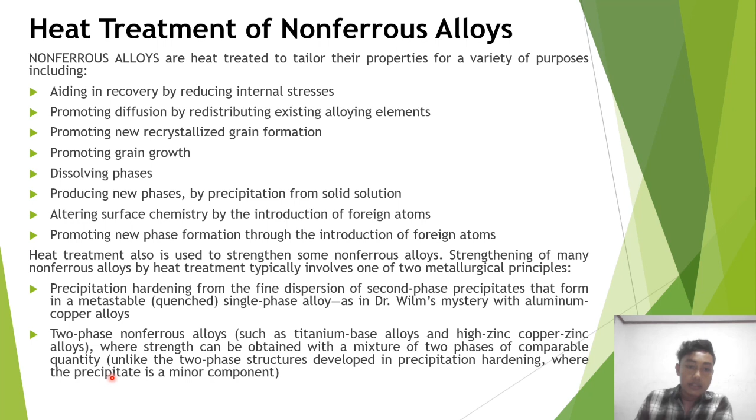Strength can be obtained with a mixture of two-phase comparable quantity, unlike the two-phase structure developed in precipitation hardening, where the precipitate is a minor component.

Some common non-ferrous alloys that can be hardened through heat treatment include solution-treated and aged aluminum alloys, such as aluminum copper alloys.

Solution treatment and aged cobalt alloys. Solution treatment of copper alloys such as beryllium bronze, spinodal hardening alloys, and order hardening alloys.

Quench hardened metastable copper alloys such as aluminum bronze, nickel aluminum bronze, and some copper zinc alloys.

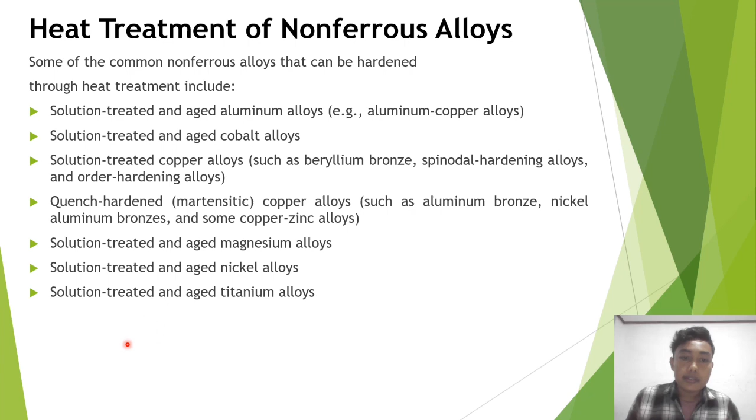Solution treated and aged magnesium alloys. Solution treated and aged nickel alloys. Solution treated and aged titanium alloys.

Next, the first material topic is recovery and recrystallization annealing. Annealing is a generic term used to denote a thermal treatment process involving heating a material to an aim temperature and holding or soaking it for a sufficient length of time at that temperature, followed by cooling at a suitable rate.

When annealing is performed for short periods of time at a low temperature, the hardness of a cold-worked alloy remains relatively constant. This initial stage is referred to as recovery annealing, as shown in picture 14.1.

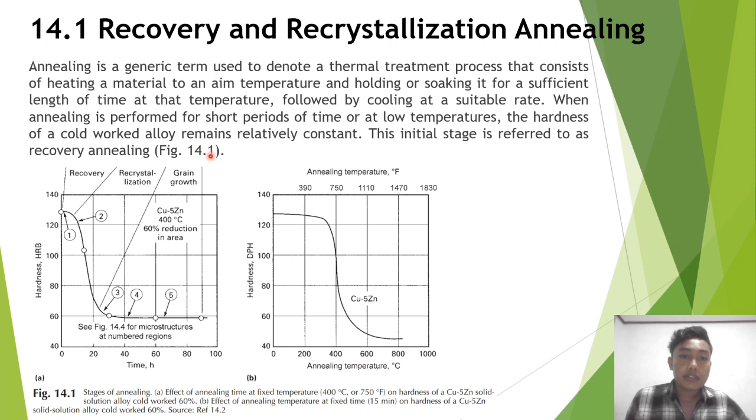Some properties do change during recovery annealing. For example, the electrical resistivity of an alloy, typically increased by cold working, can be recovered before annealing has a significant effect on hardness, as shown in figure 14.2.

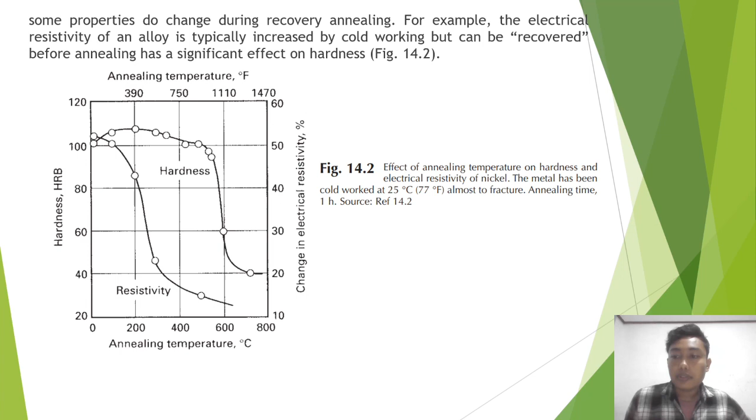Next, considering the extent of cold work: for example, an increased amount of cold work prior to annealing lowers the recrystallization temperature, as shown in figure 14.3a. There is also an approximate relationship between melting temperature and recrystallization temperature, shown in figure 14.3b.

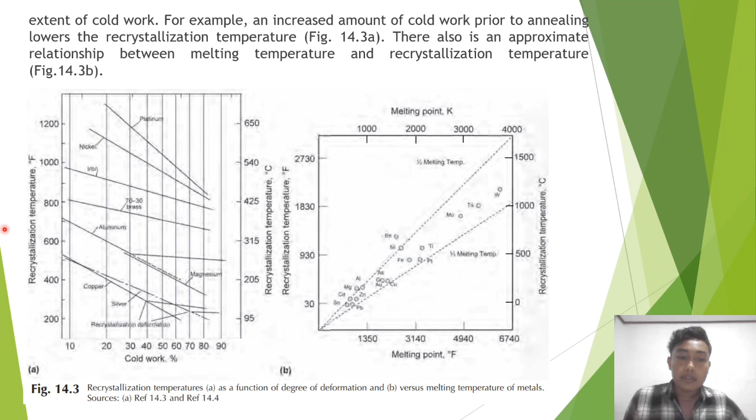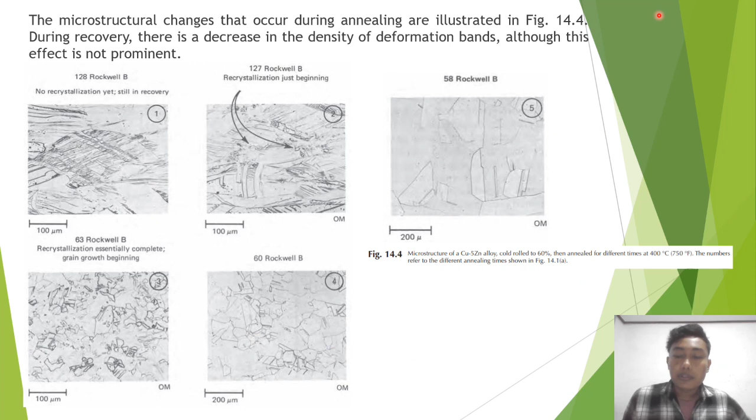The second material topic is heat treatable aluminum alloys. Wrought and cast aluminum alloys are commonly designated by a series originally developed by Alcoa. The series classifies aluminum alloys by principal alloying elements, as shown in table 14.4.

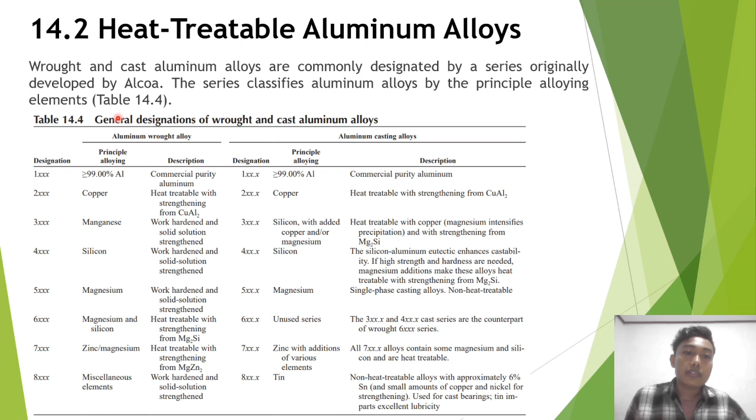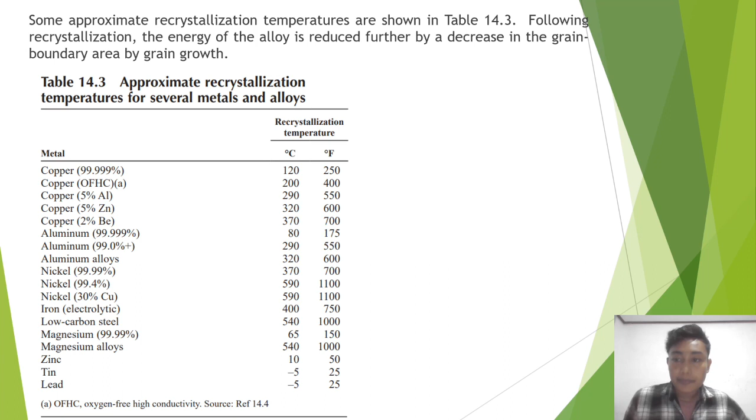Next, wrought heat-treatable aluminum alloys include aluminum copper alloys, like the 2XXX series. The aluminum magnesium silicon series is the 6XXX series, and the aluminum zinc series is the 7XXX series.

And the aluminum lithium alloys are the 8XXX series. These alloys achieve a higher level of static tensile strength, but with less improvement in fatigue endurance, as shown in figure 14.5.

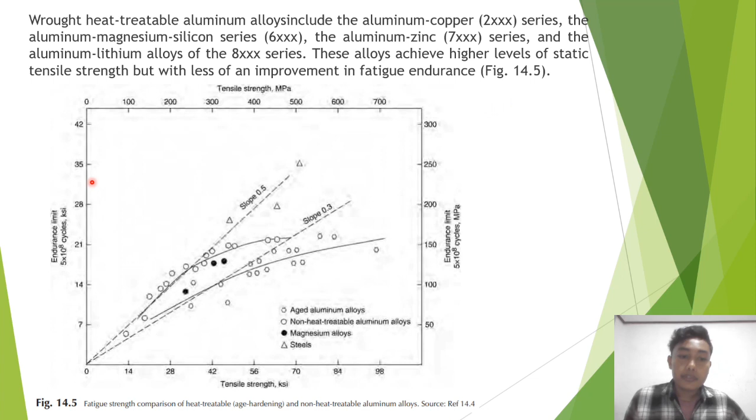Next, 14.3 cobalt alloys. Cobalt is useful in applications that make use of its magnetic properties, corrosion resistance, wear resistance, and strength at elevated temperatures. Biomedical application is another important use.

The initial biomedical applications of cobalt-based alloys are in the dental field, and early on, the alloys showed excellent wear resistance, corrosion resistance, biocompatibility, and mechanical properties.

Alloys for high temperature strength include a number of cobalt alloys.

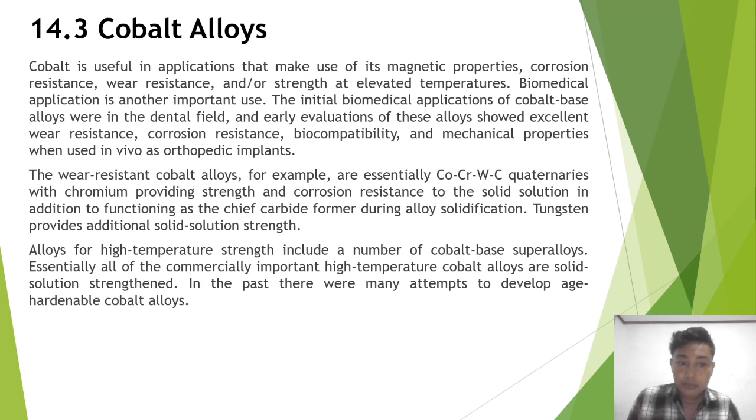Essentially, all commercially important high-temperature cobalt alloys are solid solution strengthened. Yet in the past, there were many attempts to develop age-hardened cobalt alloys, including those with cobalt, nickel, chromium, and molybdenum.

For corrosion resistant applications, there is the alloy MP35N, or UNS R30035, which is a cobalt-based composition of 35% nickel, 20% chromium, and 9.75% molybdenum, with the balance cobalt.

Following this, the presence of Co3Mo forms at platelet boundaries in the MP35N alloy during age hardening.

There is another age hardening alloy, a nickel-rich alloy, which is a combination of 36% cobalt, 19% chromium, 7% molybdenum, and balance nickel.

The difference is in their maximum operating temperature. The MP35N alloy is useful up to 400 degrees Celsius, or 750 degrees Fahrenheit, while the MP159 alloy maintains its hardness up to approximately 600 degrees Celsius, or 1110 degrees Fahrenheit.

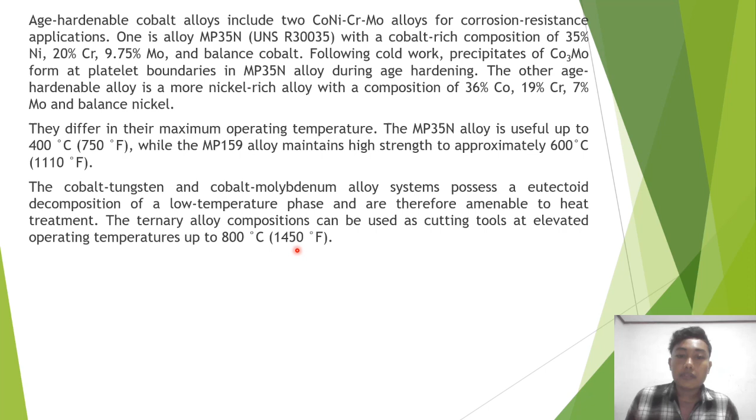Next, the next chapter is on copper alloys.

Copper can be hardened by solid solution alloying and by work hardening. The commonly used solid solution alloying elements, in order of their effectiveness, are zinc, nickel, manganese, aluminum, tin, and silicon.

A list of selected copper alloy compositions and their properties is given in Table 14.5. In this table, the alloys are arranged by common alloy group.

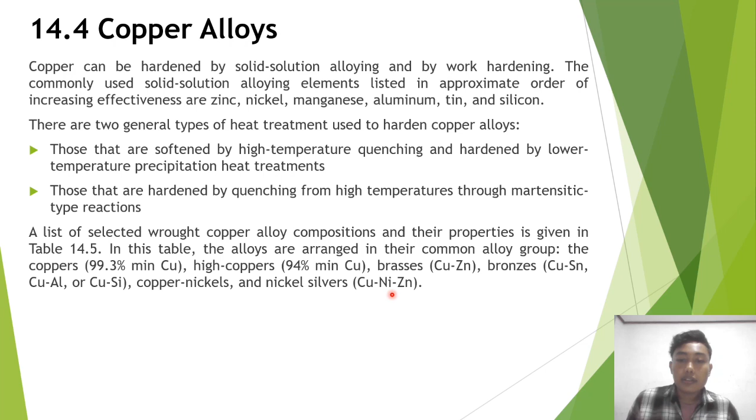Copper is 99.3% minimum copper. High copper is 94% minimum copper. Brass is copper-zinc. Bronze is copper-tin, copper-aluminum, copper-silicon. Copper-nickel and nickel-silver are copper-nickel-zinc alloys. This table is shown next.

Next, precipitation hardening copper alloys.

Precipitation hardening mechanisms are used in a few but important copper systems, including precipitation hardening beryllium copper alloy, also sometimes referred to as beryllium bronze.

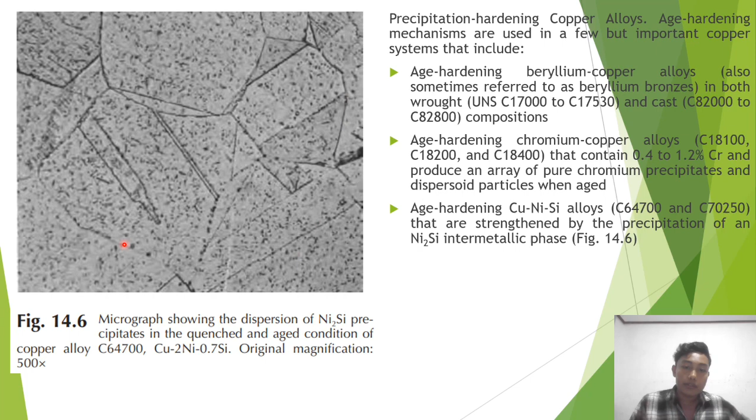Table 14.6 summarizes typical heat treatments for some hardenable copper-based alloys. Copper alloys are hardened by elevated temperature treatment rather than aging at room temperature.

Again, as in the case of aluminum alloys, the supersaturated solid solution proceeds through the precipitation cycle. Hardness increases to a peak, followed by a reduction in hardness with time. This is table 14.6.

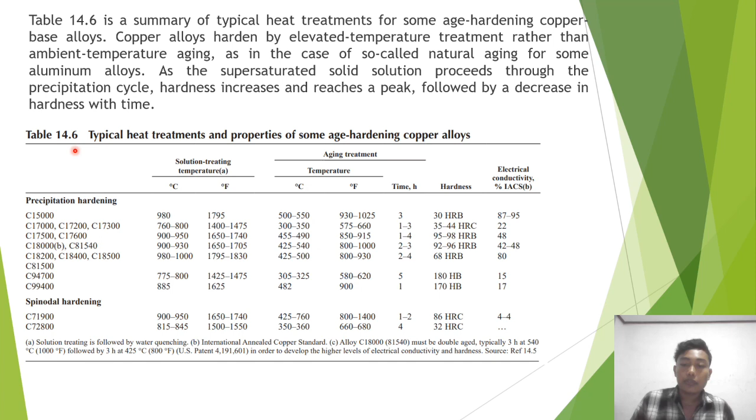Precipitation hardening copper alloys can be thermomechanically processed to provide a unique combination of formability, electrical conductivity, softening resistance, and stress relaxation resistance. As an example, the solution treatment of beryllium copper alloy is performed by heating the alloy up to a temperature slightly

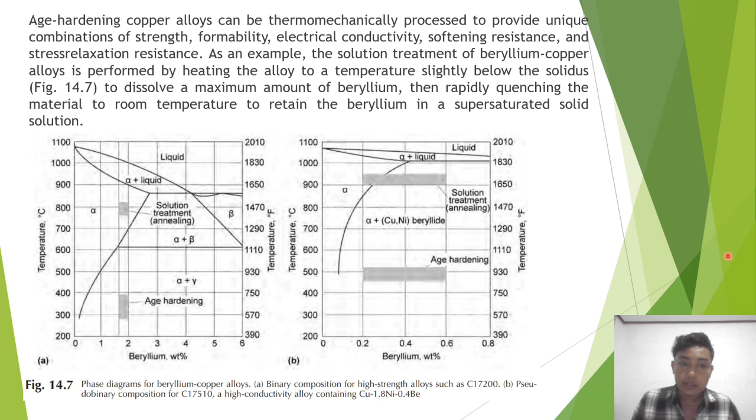below the solidus, as you can see in picture 14.7, to achieve the maximum amount of beryllium in solution. Rapidly quenching the material to room temperature traps the beryllium in supersaturated solid solution. This is the picture, as you can see.

In contrast, spinodal reaction involves continuous or homogeneous clustering or unmixing of atoms into a two-phase structure by spontaneous growth for small composition fluctuations, as shown in picture 14.8B. This is 14.8A and 14.8B.

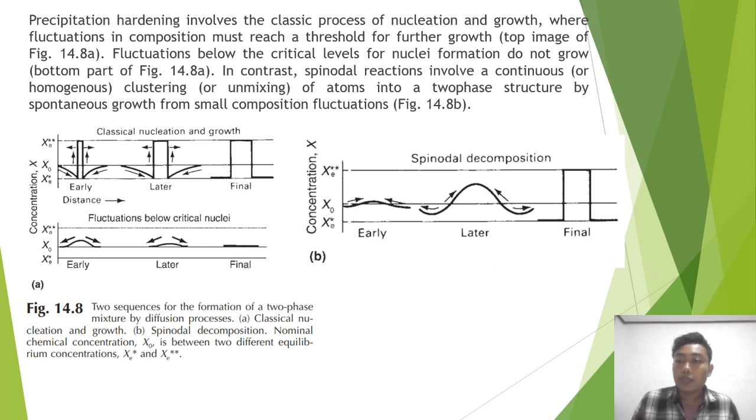The chemical segregation occurs at a very fine scale and requires the use of electron microscopy to be discriminated, as in picture 14.9. The microstructure developed during spinodal decomposition has a characteristic period, typically 2.5 to 10 nanometers, or 25 to 100 angstroms, in magnitude.

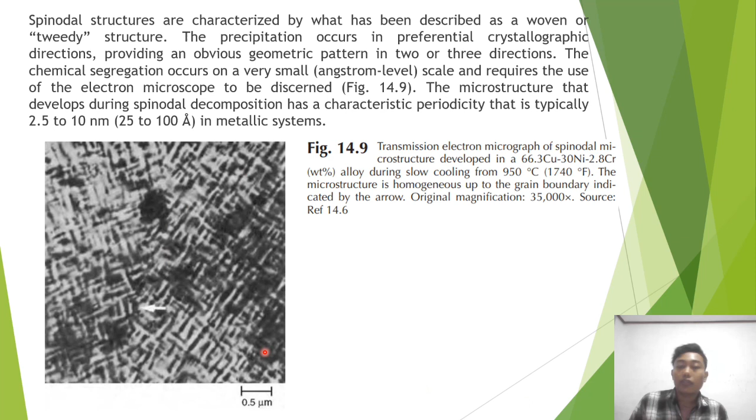These are the pictures. Heat treatment of aluminum bronze. Aluminum bronze includes 2 types.

The first is single phase aluminum bronze alloy with an FCC alpha phase crystal structure. The second is two-phase aluminum bronze, which contains the FCC alpha phase along with either a body-centered cubic beta phase, or B, solid solution phase at high temperature, or

gamma-2 intermetallic phase at lower temperature, as shown in picture 14.10. And then next,

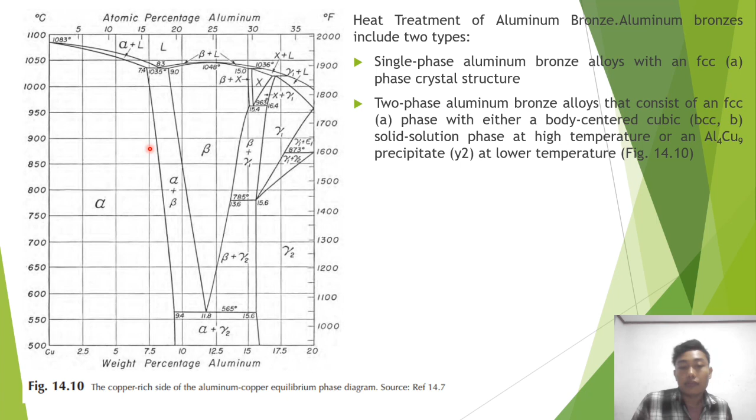like eutectoid steel with Fe-0.77%C eutectoid composition, if you have an alloy combination of Cu-11.8%Al, slow cooling from the beta phase produces a microstructure of alternating lamellar structure, like in picture 14.11, much like pearlite in steel.

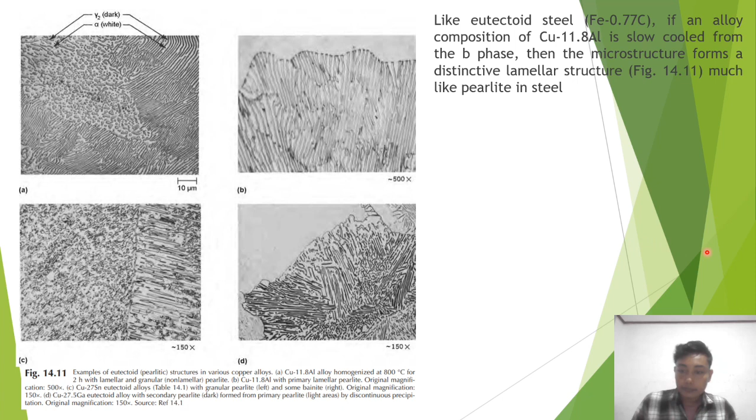This is a picture, as you can see. And next, the microstructure of beta prime has a different structure, like a plate-like morphology, as shown in picture 14.12.

Quench hardening is done with two-phase aluminum bronze containing 9 to 11.5% aluminum, as well as nickel-aluminum bronze with 8.5 to 11.5% aluminum. This is the picture.

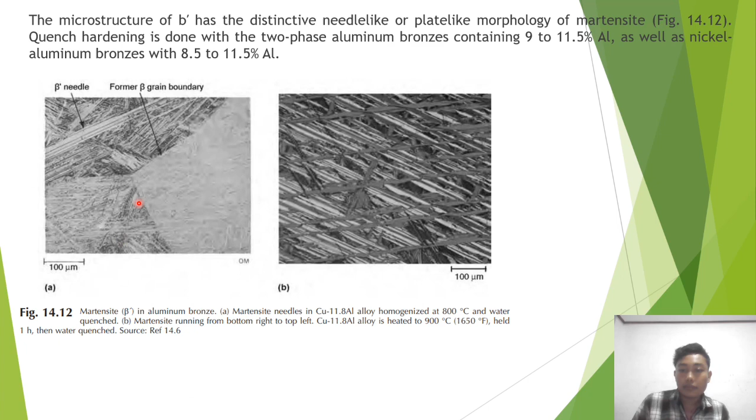Next, about table 14.7, which gives typical tensile properties and hardness of 2-phase aluminum bronze after various heat treatments. You can see this in the table.

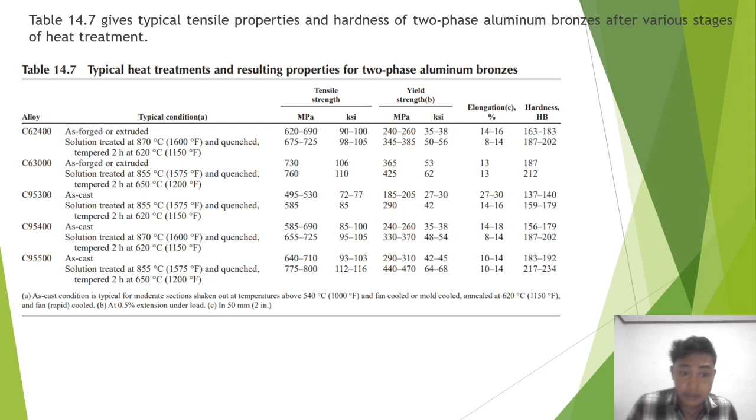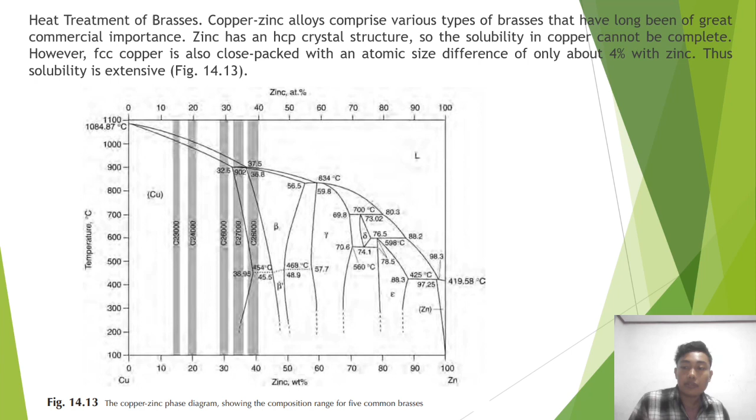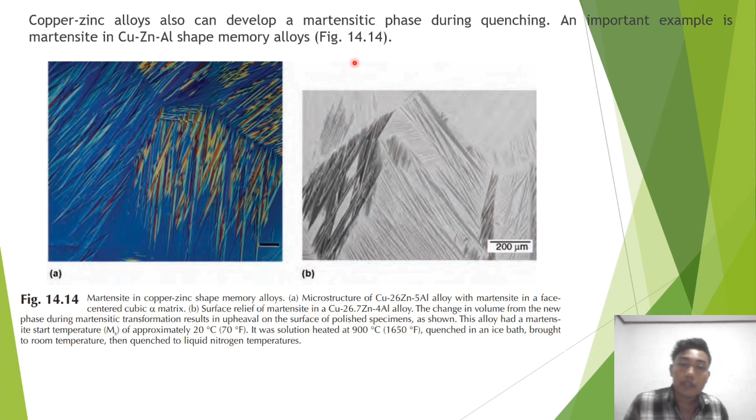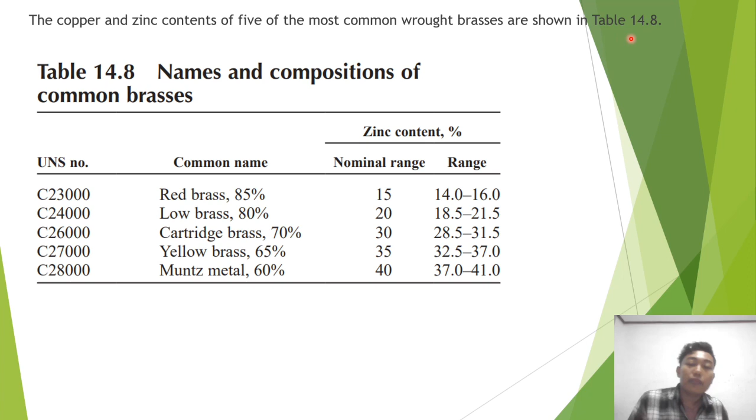This is picture 14.13. Next, copper-zinc alloy can also develop a martensitic phase during quenching, an important example is martensite in Cu-Zn-Al, as shown in picture 14.14. Copper-zinc content found most commonly worldwide is shown in table 14.8.

Next chapter is magnesium alloys. The precipitation occurring in many magnesium alloys does not always result in hardening. In many magnesium alloys, lattice straining is lost early in the formation of precipitates.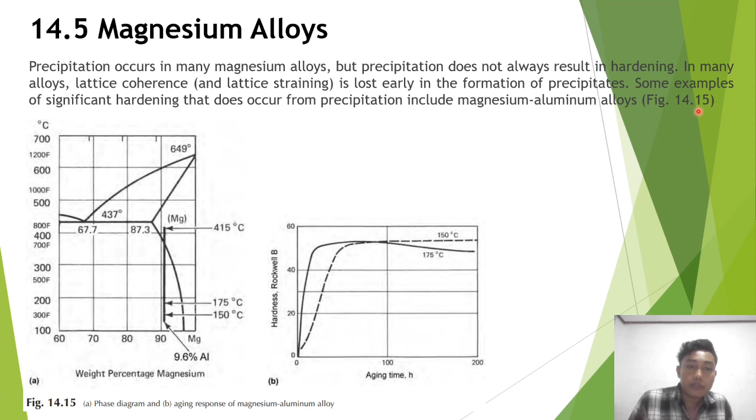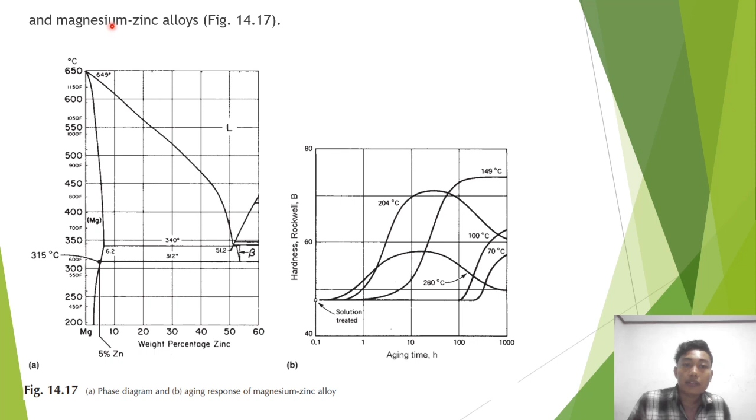Some examples of significant hardening that does occur from precipitation, including magnesium-aluminum alloys, are shown in picture 14.15. Next, magnesium-thorium alloy is shown in picture 14.16, and next, magnesium-zinc alloy in picture 14.17.

Next, section 14.6, nickel. Nickel is an austenite former, and no allotropic phase transformation occurs in nickel or the high-nickel family of alloys. In heat treating nickel or nickel alloys, it is critical to minimize exposure to sulfur in solid, molten, or gaseous forms like SO2 or H2S.

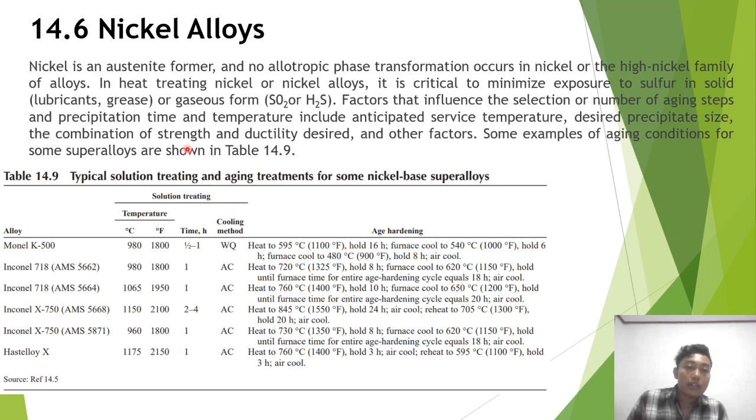Factors that influence the selection of aging time and temperature include prior processing, surface condition, section size, and the desired combination of strength and ductility, among other factors. Some example aging conditions for superalloys are shown in table 14.9.

In terms of microstructure, the gamma-prime precipitate has a rather unique cuboidal morphology, as shown in picture 14.18C, and its size is determined by aging conditions as illustrated by the microstructure in picture 14.18.

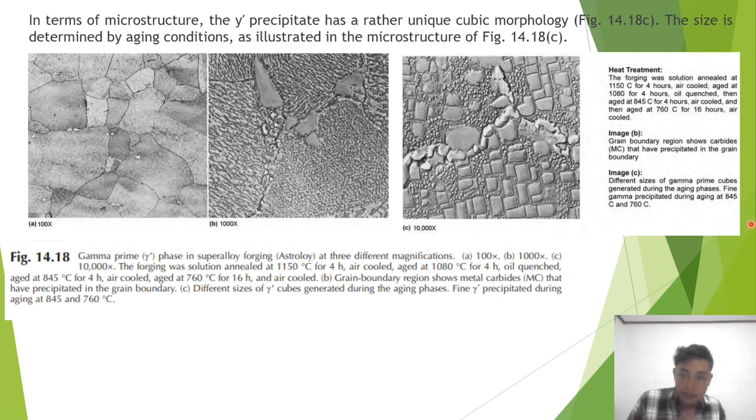Next, chapter 14.7, titanium alloys. Titanium and titanium alloys are heat treated in order to reduce residual stress developed during fabrication or stress relief, and to produce an optimal combination of ductility, machinability, and dimensional and structural stability.

To increase strength through solution treating and aging, and to optimize special properties such as fracture toughness, fatigue strength, and high-temperature creep strength. Like iron, titanium is allotropic. Titanium has an HCP crystal structure called alpha phase.

This phase exists at temperatures below 885 degrees Celsius, or 1625 degrees Fahrenheit. When pure titanium reaches a temperature of 885 degrees Celsius, called the transus temperature of titanium, the crystal structure changes to the BCC structure.

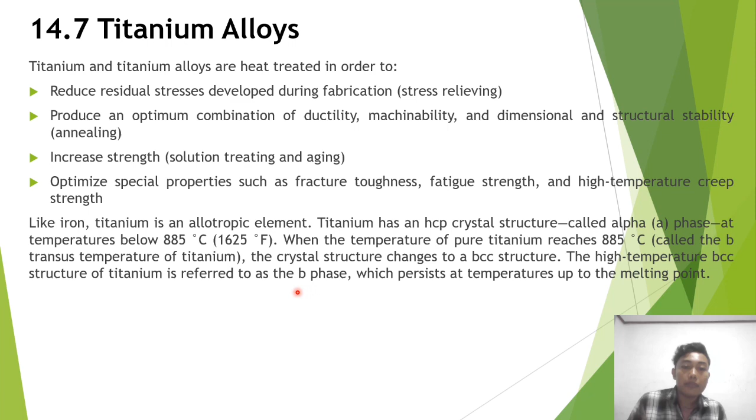The high-temperature BCC structure of titanium is referred to as the beta phase, present at temperatures up to the melting point. Next, alloying elements either raise or lower the temperature for the alpha-to-beta transformation.

So alloying elements in titanium are classified as either alpha stabilizers or beta stabilizers. The alpha stabilizer dissolves primarily in the alpha phase, expanding that field and thus raising the alpha-to-beta transus, as shown in figure 14.19A.

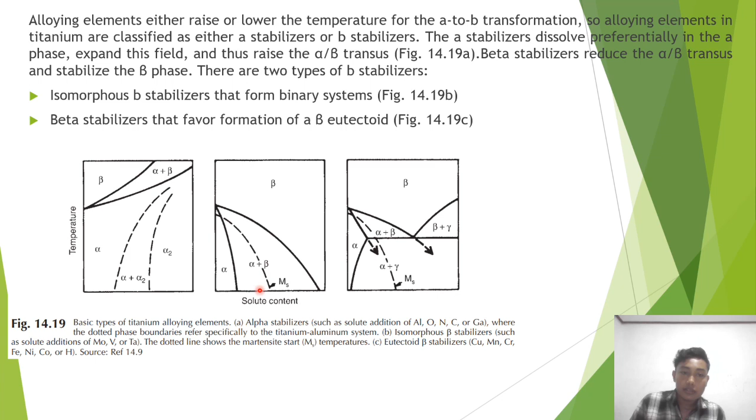Beta stabilizers reduce the alpha-to-beta transus temperature. There are two types of beta stabilizers. The first is isomorphous beta stabilizer, formed by a binary system as shown in picture 14.19B. Then beta stabilizers that favor formation as beta eutectoid, as shown in picture 14.19C. This is the picture, as you can see.

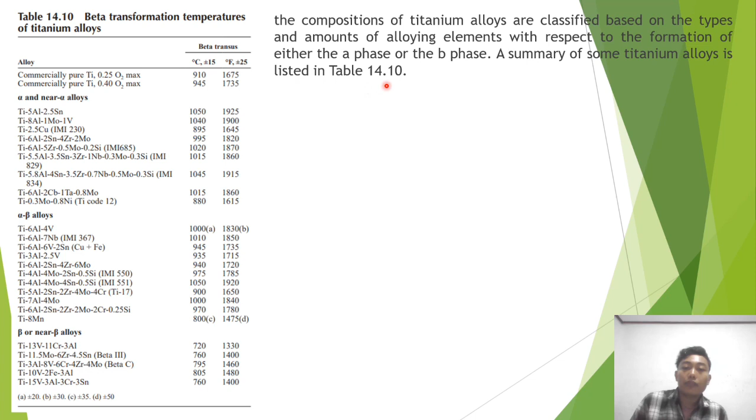Next, the classification of titanium alloys is based on the type and amount of alloying element with respect to the formation of alpha phase, beta phase, or both. A summary of some titanium alloys is listed in table 14.10.

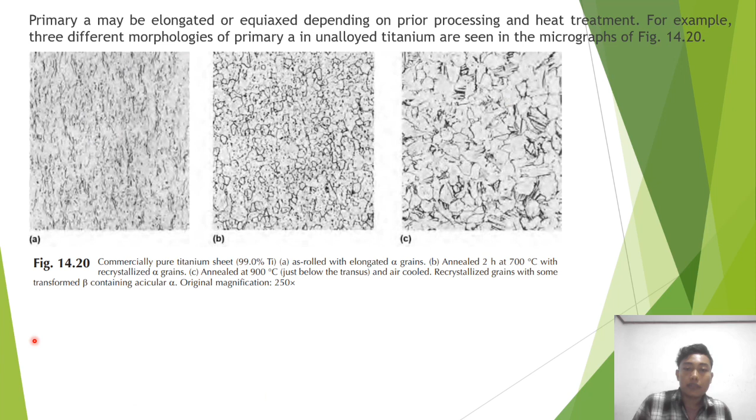Next, primary alpha may be equiaxed or elongated depending on prior processing and heat treatment. For example, three different morphologies of primary alpha in unalloyed titanium are seen in the microstructure shown in picture 14.20.

The amount of beta phase compared with secondary alpha-beta becomes more predominant in alpha alloys, such as Ti-6Al-2Sn-4Zr-6Mo, as shown in picture 14.21. When those alloys are quenched from a heat treatment temperature of 870 degrees Celsius, or 1600 degrees Fahrenheit...

the microstructure contains beta phase, dark, with primary alpha, white, as shown in picture 14.21b. For example, more of the primary alpha becomes beta during heat treatment, and some of this beta transforms during cooling, producing secondary alpha precipitation, as shown in picture 14.21b.

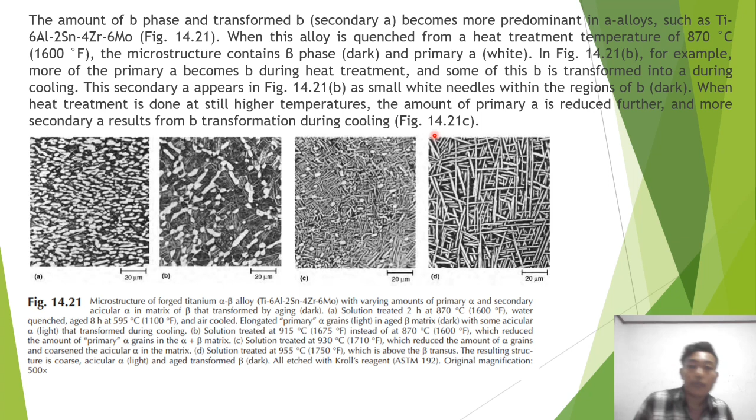Next, depending on cooling rate, the areas of secondary alpha phase have different appearances for shape, described as small plate-like, acicular, Widmanstätten, serrated, or martensitic, as shown in picture 14.22.

This is the microstructure of the alloy at 1177 degrees Celsius (2150 degrees Fahrenheit), cooling at three different rates. Lamellar or plate-like structures occur with slow cooling as in picture 14.22a, while acicular structures occur at a high cooling rate as in picture 14.22b.

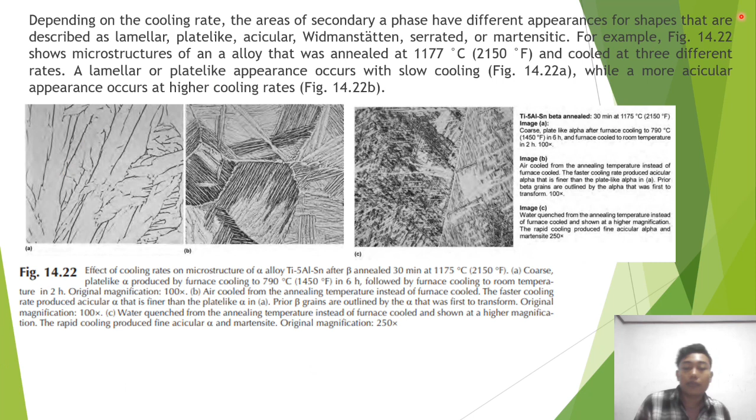Next, beta stabilizer lowers the Ms temperature, as illustrated in picture 14.23, for the variation of vanadium content added to the Ti-6Al composition.

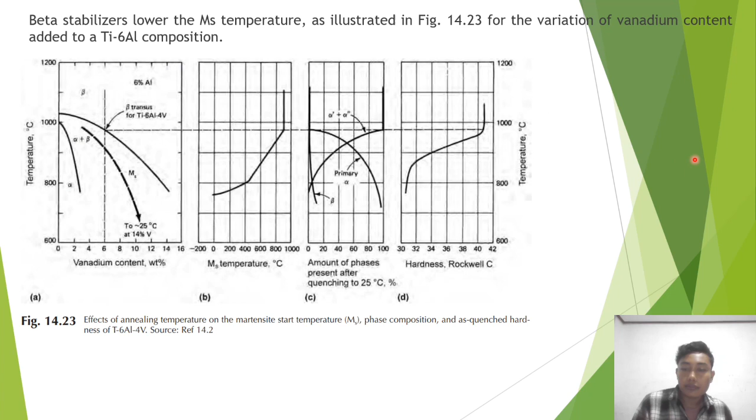Sometimes it is difficult to distinguish between martensite and acicular alpha, although acicular structures are usually less well defined, having curves rather than straight lines. Martensite in titanium and titanium alloys typically occurs as fine plates, as shown in this picture, 14.24.

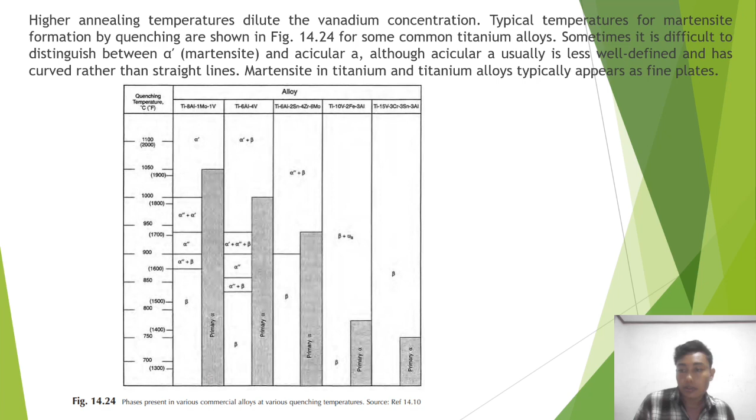Next, this decomposition of retained beta or martensite in its form is the basis of heat treating titanium alloy to high strength. The time-temperature combination selected depends on the requirements.

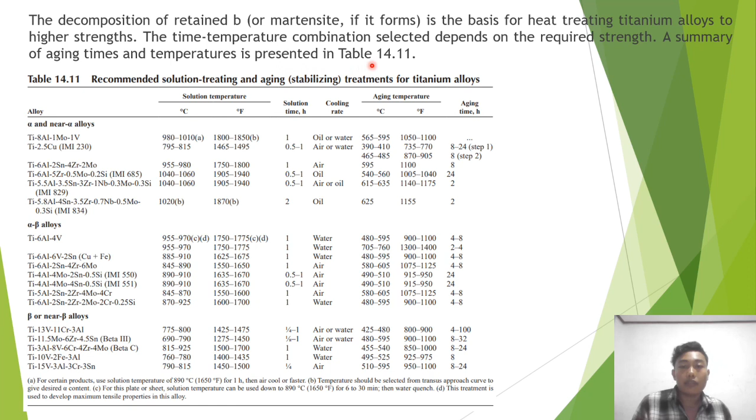A summary of aging time and temperature is shown in table 14.11.

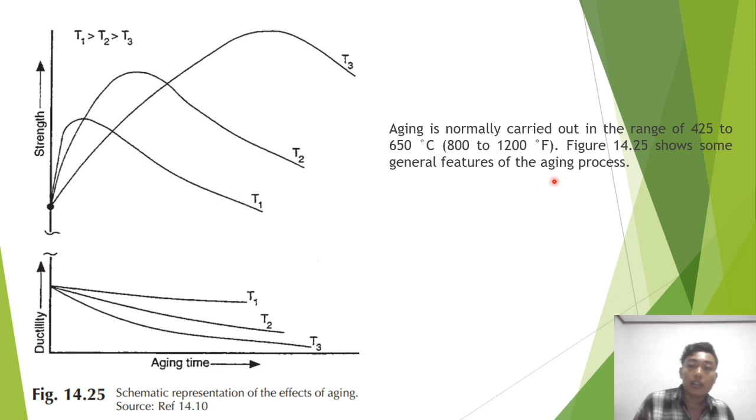Aging is normally carried out in the range of 425 to 650 degrees Celsius, or 800 to 1200 degrees Fahrenheit. Figure 14.25 shows some general features of the aging process.

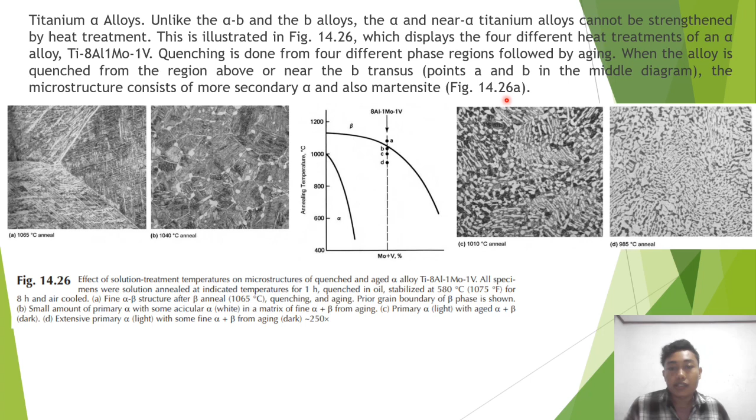The microstructure contains more secondary alpha, also shown in figure 14.26a.

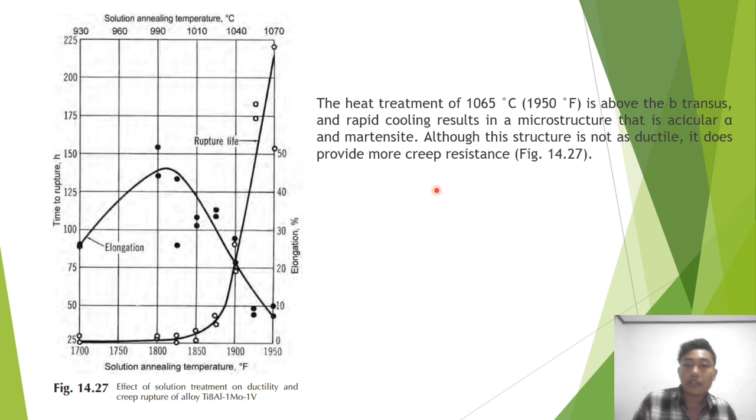Heat treatment at 1065 degrees Celsius (1950 degrees Fahrenheit) is above the beta transus, and rapid cooling results in a microstructure that is acicular alpha and martensite, although the structure is not as ductile, it does provide more creep resistance, as in figure 14.27.

Titanium alpha-beta alloys are also the most common and most versatile of the three types of titanium alloy. Phase composition, size, and distribution can be manipulated by heat treating within certain limits to achieve specific properties or strength levels.

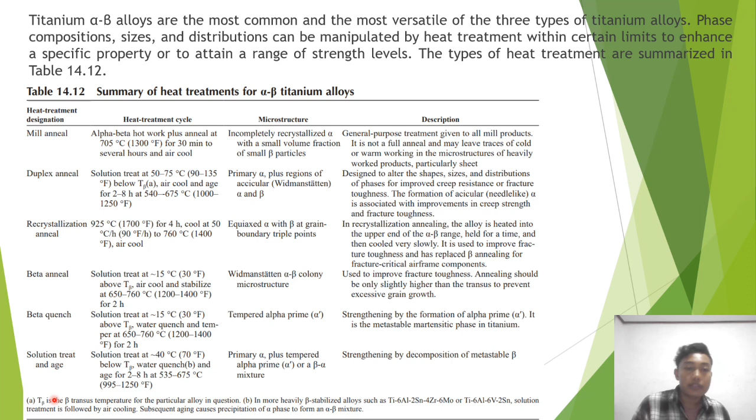The typical heat treatment is summarized in table 14.12.

This picture is 14.28.

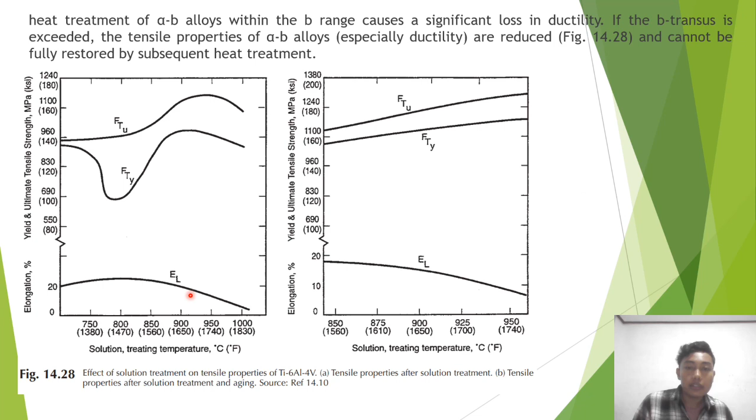Next chapter is on non-ferrous alloys.

Coin silver content is 10% copper, the most commonly used alloy. Fine silver is 99.9% silver.

All silver alloys with more than 2% copper can be precipitation hardened by solution treating at approximately 750 degrees Celsius (1375 degrees Fahrenheit), and aging at 250 to 350 degrees Celsius (475 to 650 degrees Fahrenheit).

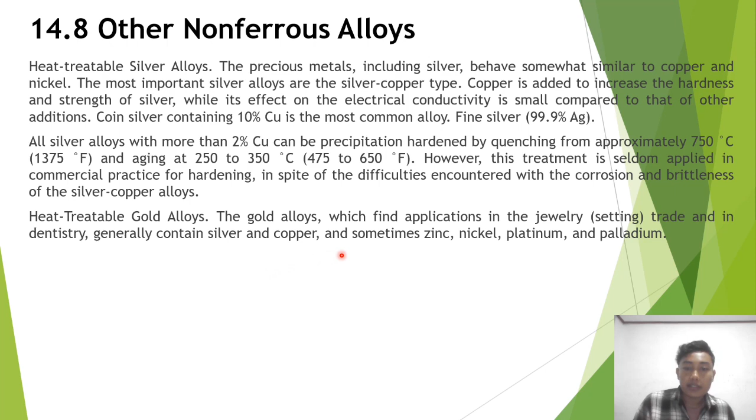Heat treatable gold alloys find application in jewelry settings and in dental applications. They generally contain silver and copper, and sometimes zinc, nickel, platinum, and palladium.

After casting, they are age-hardened at room temperature, attaining their hardness up to a temperature of approximately 100 degrees Celsius (200 degrees Fahrenheit).